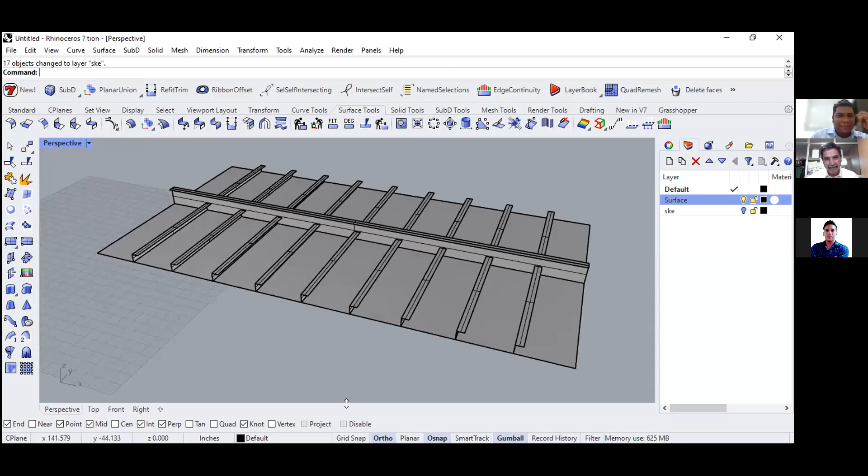I didn't. So right. Wow. You completed all. Did you copy from somebody? No. It's easy. Okay. That's nice. Good. Nice. I like it. So you're a good instructor, Isaac. You can take my place now. Okay, we are going to continue now. Exactly.

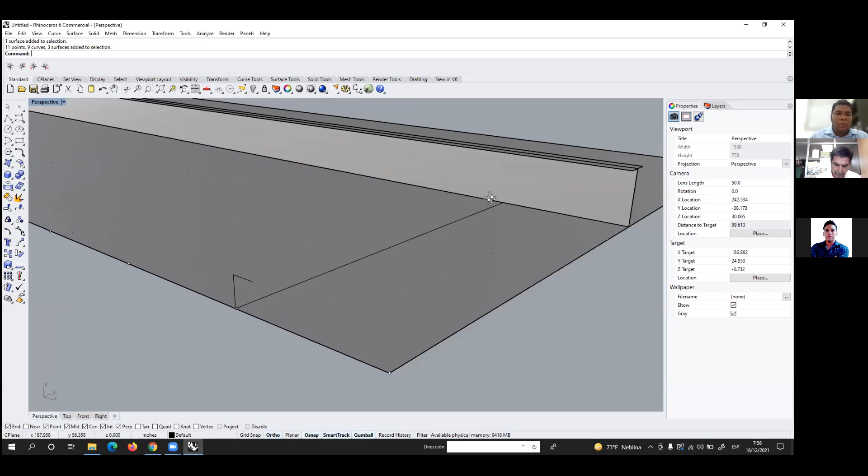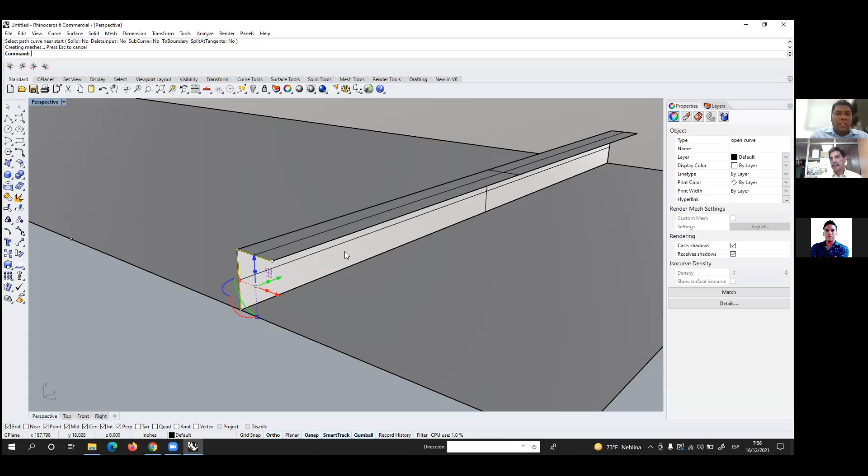So the next step is the same. You have to extrude this profile along this line, right? So click on this profile of the thickness, then go to Surface, select Extrude Curve, and then Along Curve. Then you have to select a path. So this is the extrusion of the profile. Okay. So the next step is to copy this profile, this surface, to every point.

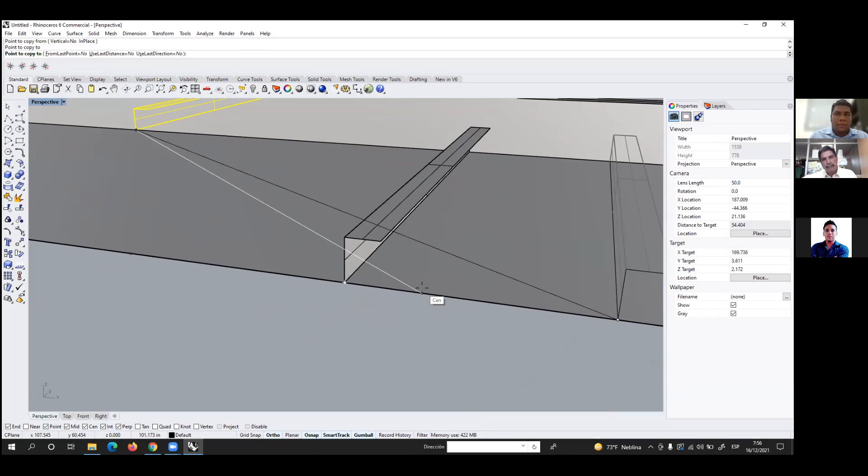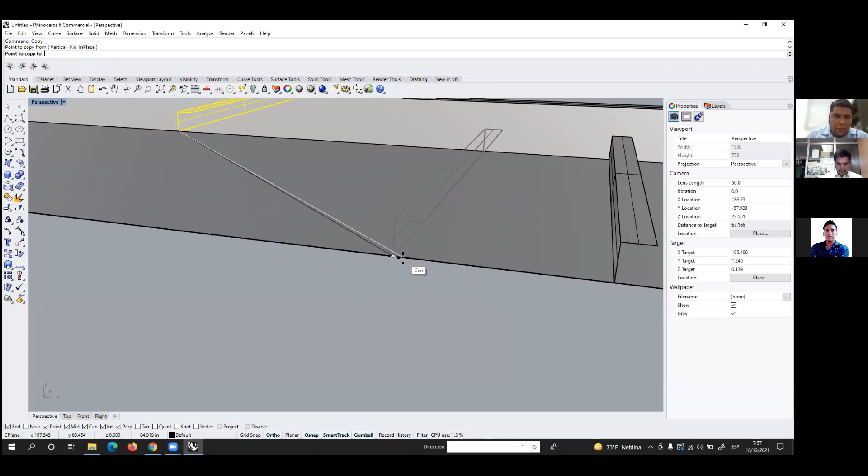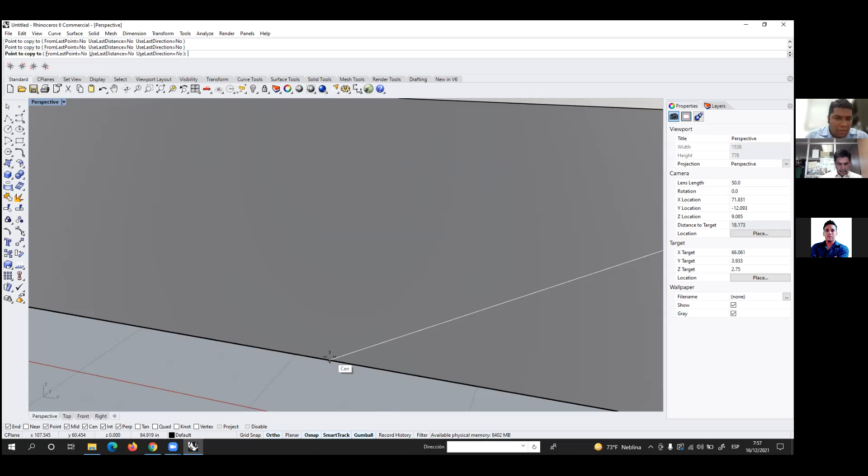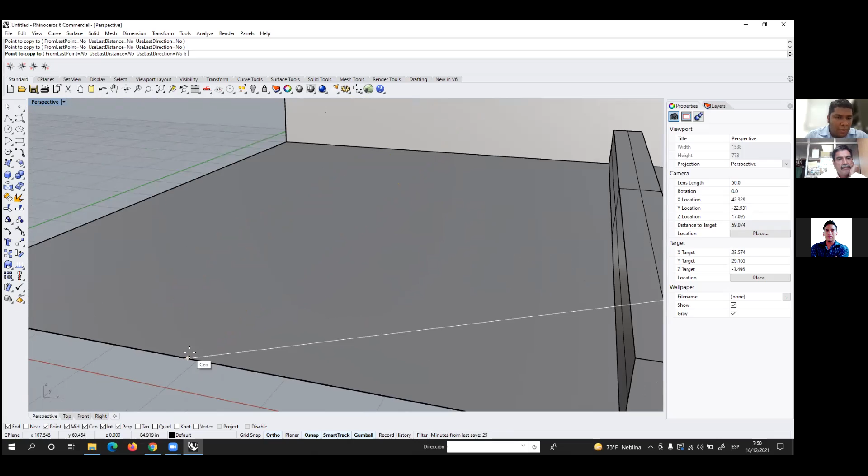One moment. One moment. Okay, so copy this for each point. At each point, copy for each point. Each point. The last one. Yeah. So there are 2, 3, 4, 5, 6, 7, 8, 9 thicknesses.

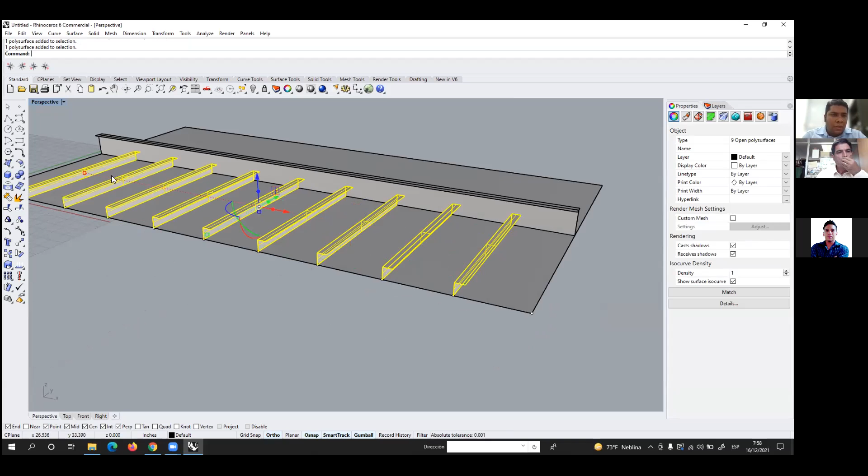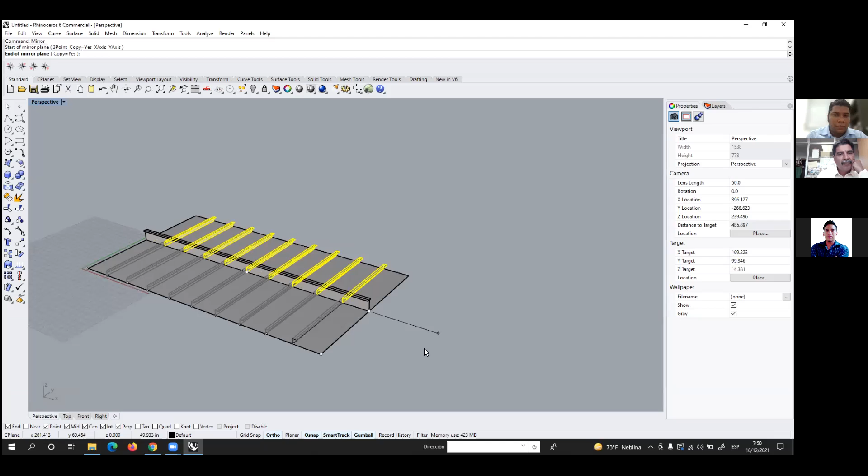Okay, so then you have to select those stiffeners and use the Mirror tool. So type mirror and then enter, and select this point in the middle of the plate, and you see that the other part is drawn by symmetry. Okay, so next you can hide the isocurves, remove these points, and the final step, you have to delete every line that you drew, because you have to import only surfaces.

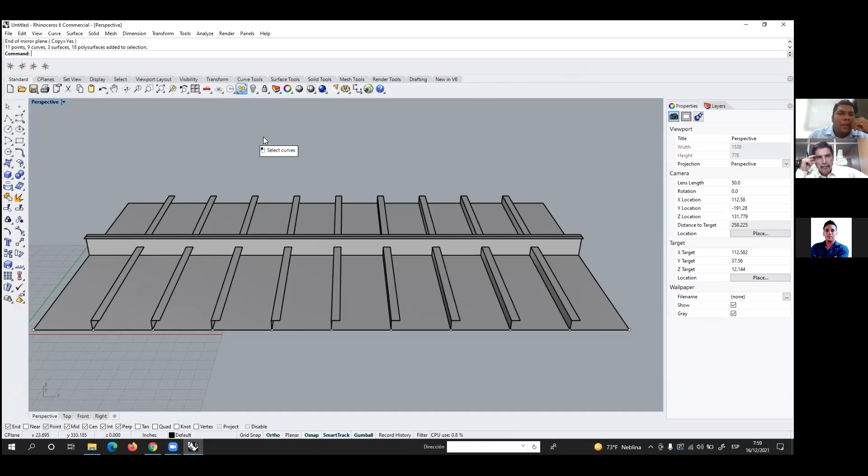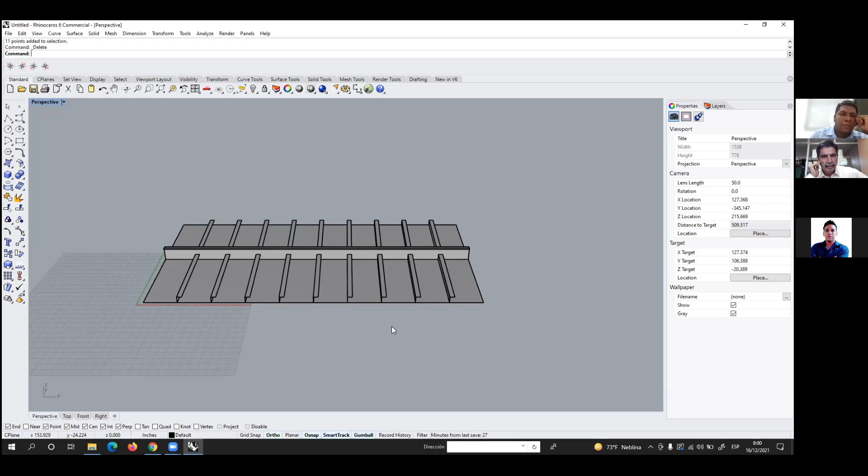So for this part, go to these options. Select all lines, all curves, and click delete on the computer, similarly for the points, because there are points in this part. So you have to go to this icon and select points. You see that the points are selected, and then click delete on your computer. So this is only surfaces.

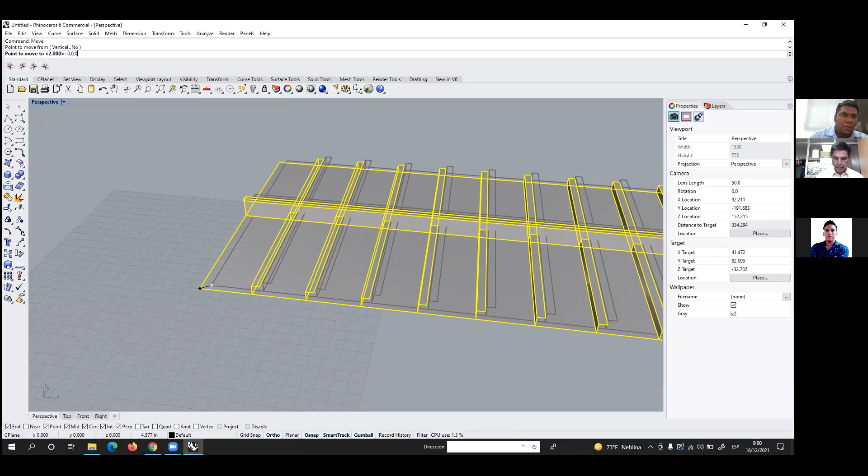So the final step is to select every surface and move it to the 0 point. So click on Move, select the point that you want to move, and then click the point 0,0,0, and then enter. So you see that the geometry is located at the 0 point, the origin. Okay, so that's all of the geometry. Okay, questions, students, questions so far? Can you do it? Is it easy, difficult?

Excuse me, can you repeat deleting lines and points? Okay, go to these options. And you see that in this icon, on the right part, there is an arrow. So click this arrow, and you see every option that you can select. You can select by layer, by faces, by lines, by points, by solids. So in this case, you can select curves, and you see on your screen that the curves are selected. The same for the joints. The same for the points. Okay, thank you.

So you see now, okay, then the next step is to open, I think, Practice 1. This is the file that we did in the previous class, right? Practice 1. Engineer, I have a question. I'm sorry. When I save in IGES format, there is a notification asking how I can save it in IGES units. The program asked me right now. I have to save in inches too? Yeah, okay, in inches. Okay.

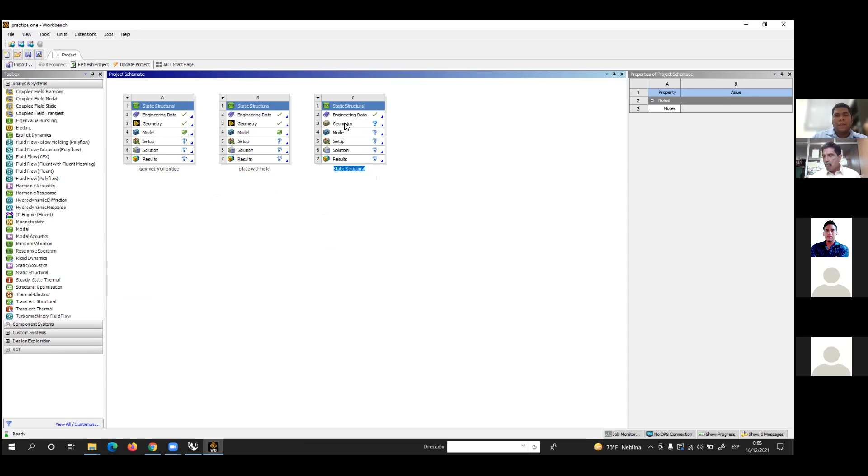So remember the two exercises that we did in the previous class. Similarly, drag a Static Structural to the workspace, and remember that Engineering Data is to put the mechanical properties of the material, okay, and the geometry. Right click on Geometry, and then enter the New DesignModeler.

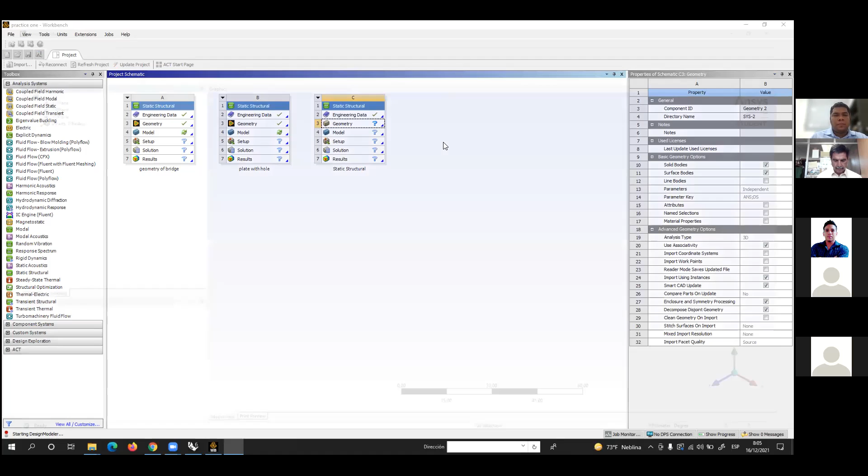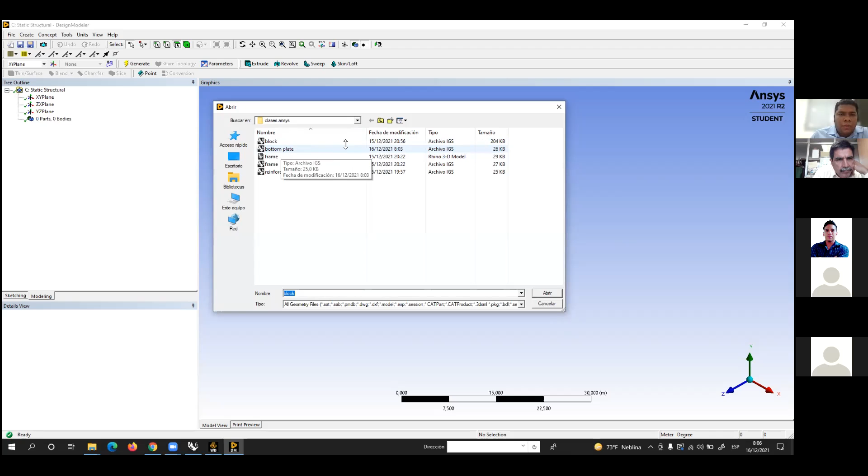Okay, so go to File, and then you have to use this part, Import External Geometry File. So select Import External Geometry File, and you see that this is bottom plate in this format. So select bottom plate, and then this is the import. Then you have to click on Generate. You see the geometry.

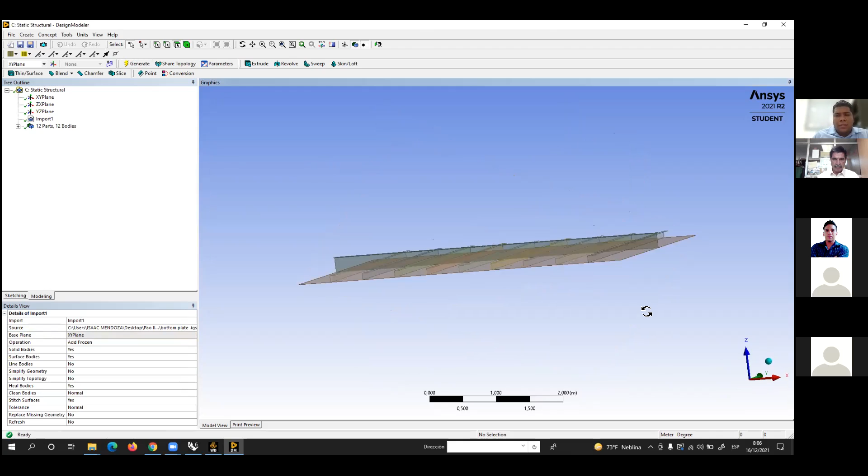Okay, so remember that the geometry unit is in inches. So you have to change the unit to inches right now. Okay, so the final step is to assign the thickness for each element, right? So you see in this part there are 12 surfaces. You see, for example, the shell, the other shell that you see in the yellow part. So you see the thing, right? So the other stiffeners. This is, you see, the flange of the longitudinal girder.

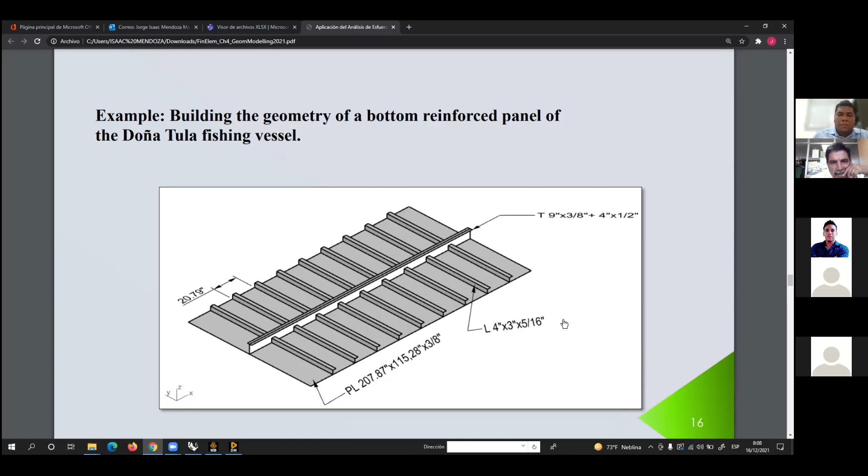The other option is the web, and the other is you can enter the thickness. For example, the thickness of each stiffener is 3/8. No, it's 5/16. So in inches, 5/16 is... the thickness of the stiffener is 0.3125. So this is the value that you have to input.

So you can select, for example, if you want to assign the thickness for all the thickness, you have to click on the first stiffener and then select shift, and then go to the last stiffener and select this part. So all the thickness are selected now.

So you can input the thickness now. In the thickness mode, change to user defined and then the value of the thickness is 0.3125. So right now you see in the upper part and the lower part the thickness for each stiffener.

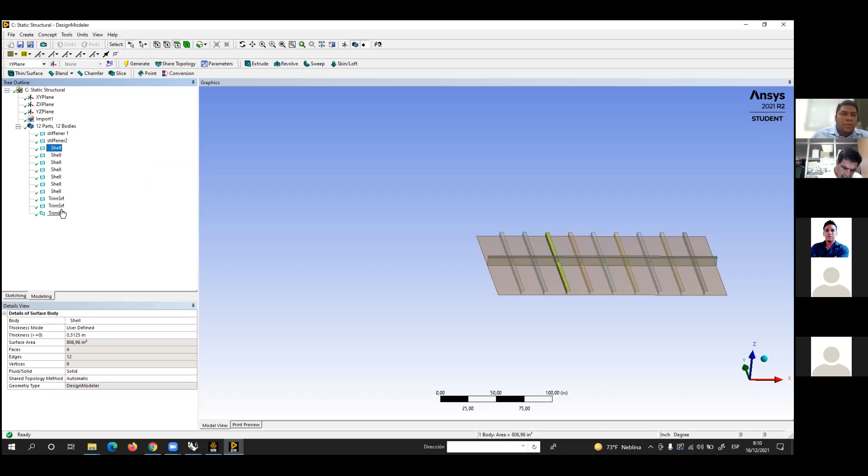So the same for the flange and web. You can rename and put, for example, flange. Then rename and put the name web, and the other surface rename and put bottom plate.

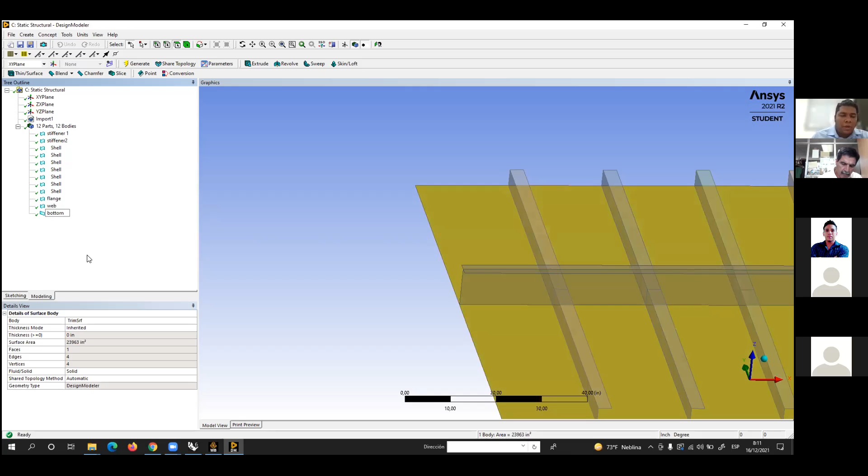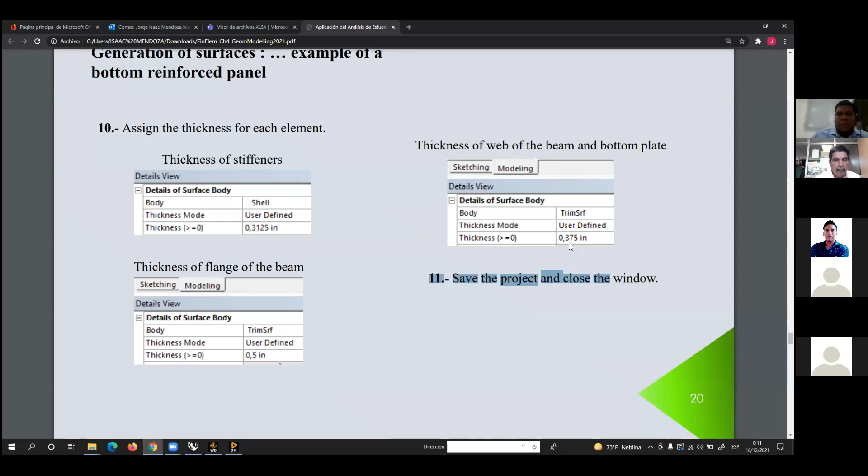So the thickness of the flange is 0.5, and the web is 0.375. Flange is, you have to change to the user defined and then input the thickness.

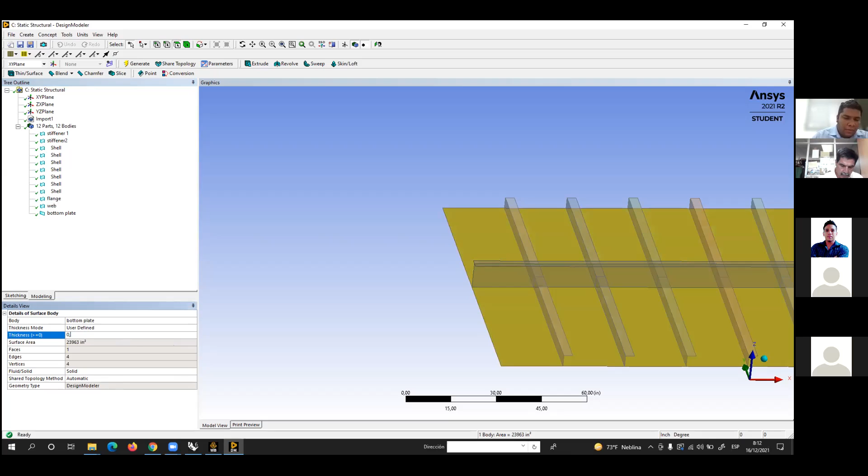0.5. Web, so the same, and this is 0.375, the same for the bottom plate: 0.375, that is comma 375. Okay, so that's all.

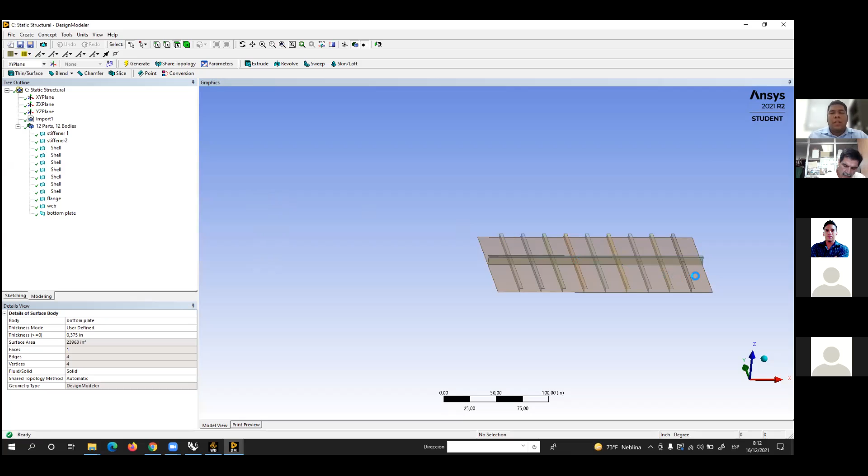So this is the geometry with the thickness of the structure. Remember, always save the project, always, and then you can close the window.

So now the exercise is finished. Questions so far? Any student can... let me stop the screen. Any student, can you do this exercise? Can you import the geometry to Rhino, from Rhino to ANSYS? Any student?

Yes, engineer. Can you show me? Can you show us? Yes. Yes, okay.

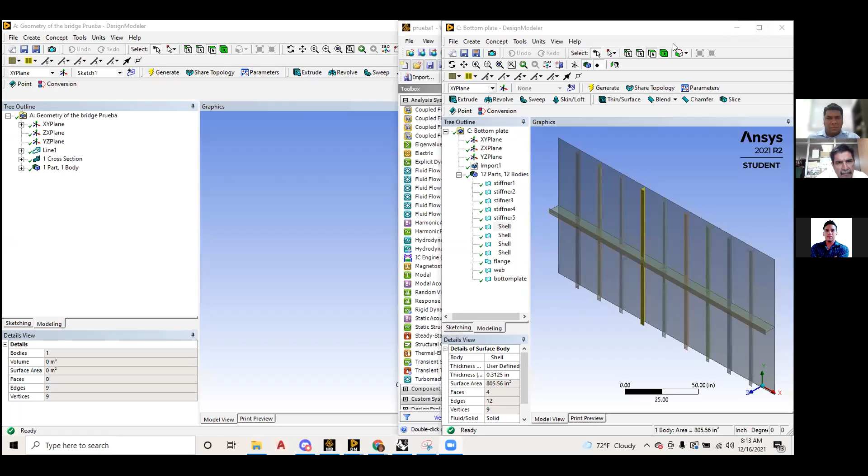Did you assign the thicknesses for every part of the structure, Ms. Vera? Ms. Vera, did you assign the thicknesses for each part of the structure? Ms. Vera, can you hear me? Right.

Okay, it was nice because she changed the names of the elements, so she can easily identify each one of the elements in the structure. That's a good practice, that's a good practice.

Okay, let's move on, Isaac, to the next exercise. Okay. Let me...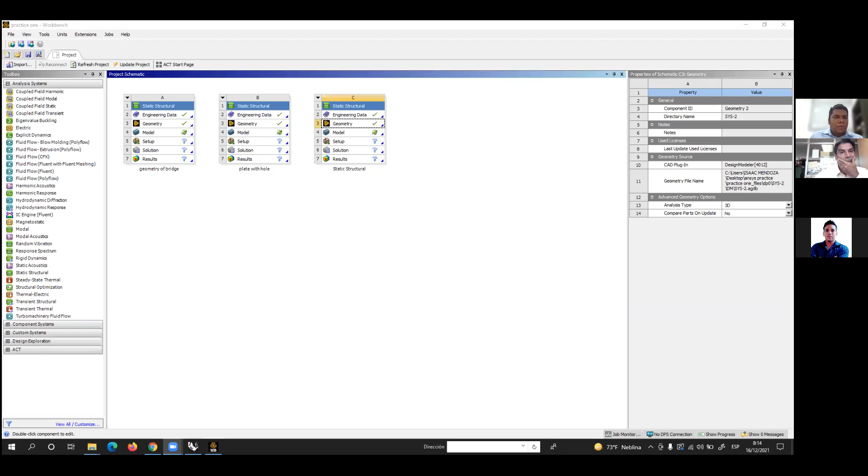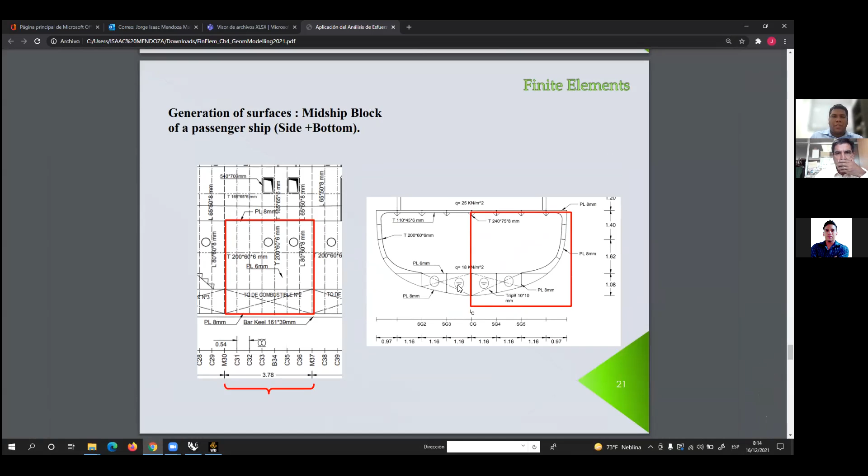So the next exercise is to create a midship block of a passenger ship. So you have to draw the side plus bottom. This is a part of a ship, but the ship is a passenger ship. So you can see the frame in this part.

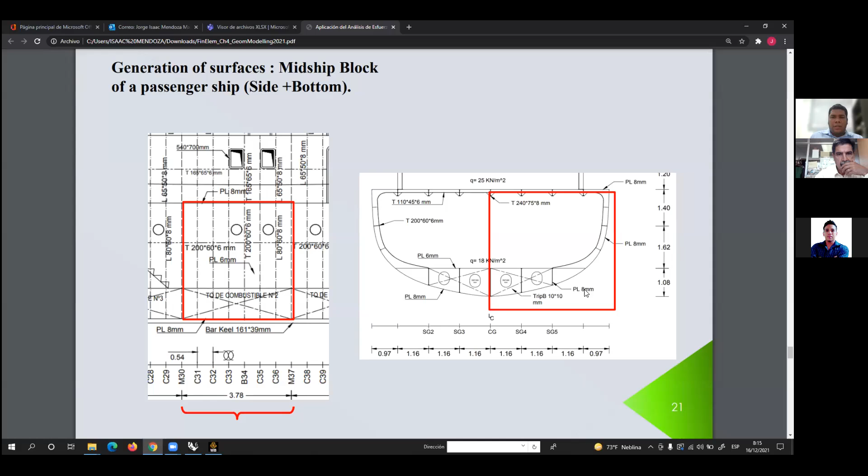For example, you see the thickness of the plate, this is 8 millimeters. This is the longitudinal girders, which is also plate, and the thickness is the same. So the bottom, the inner bottom, is 6 millimeters.

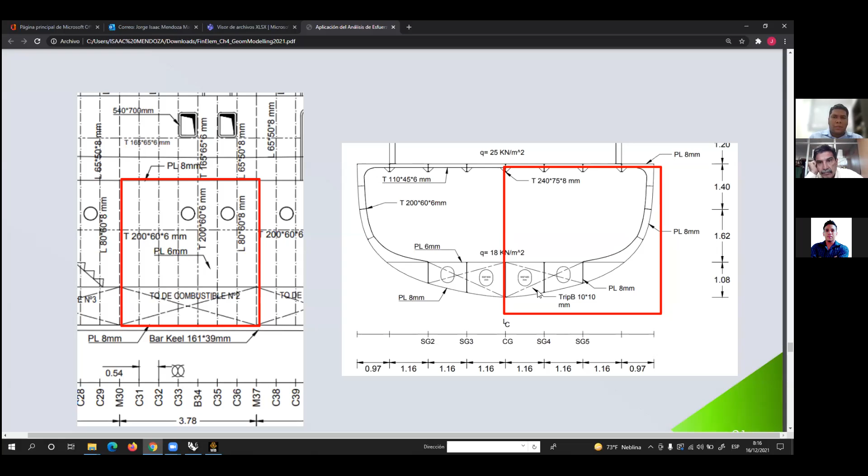In the side, you see a frame. So the frames, you can see in this part of the frames the profile of T. This frame is 80 millimeters per 60 millimeters, and the thickness is 8 millimeters. So you see that in this part you see the web frame, which is a big frame. This is more higher in this part.

What else? So this block is between bulkhead, from bulkhead 30 to bulkhead 37. So this length is 3.78 meters.

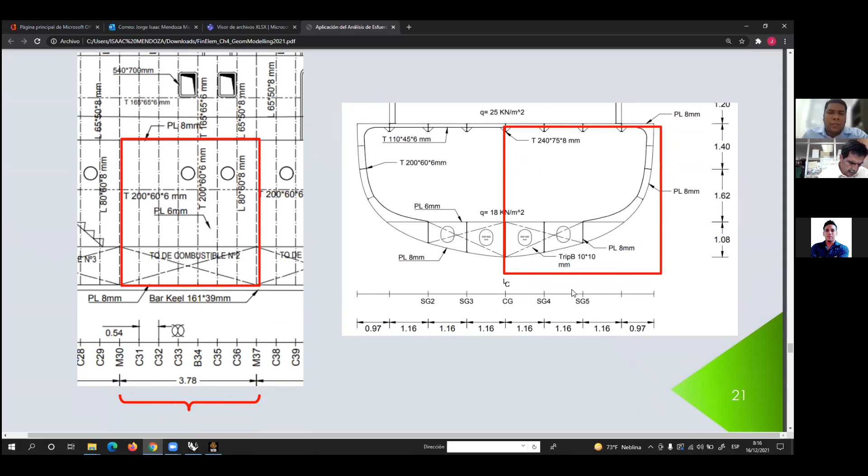That's all. So in this part we're going to do the modeling in Rhinoceros. So we start with these stations, with this frame, with the stringer and the double bottom and the side girder, and then you have to extrude this line in the x-axis, the extrusion dimension is around 3 meters.

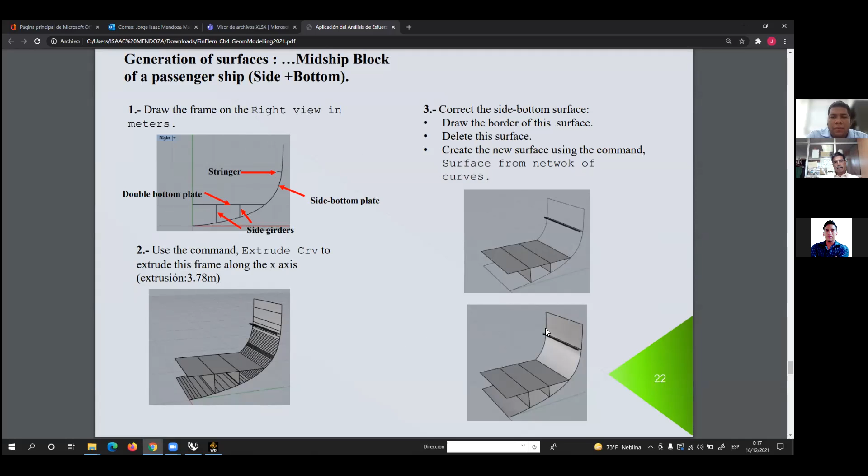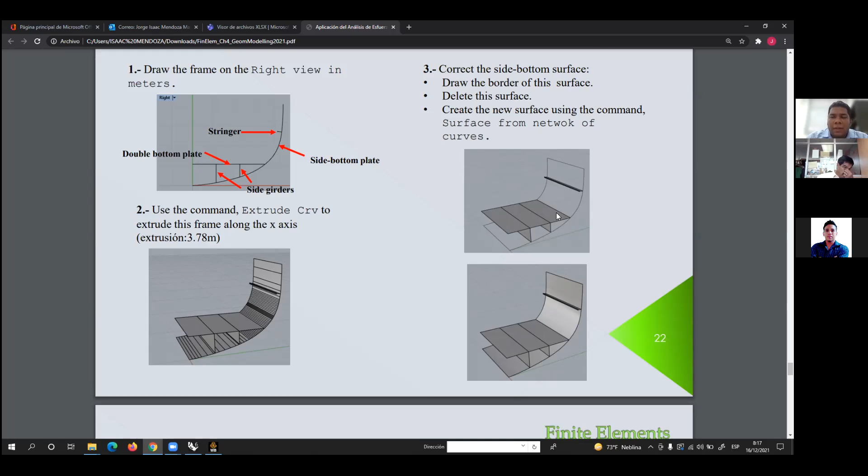And then in the next step, you have to correct, or improve the surface in the side bottom. So you see when I explain in Rhinoceros, right view. So next you have to use the tool contours in order to...

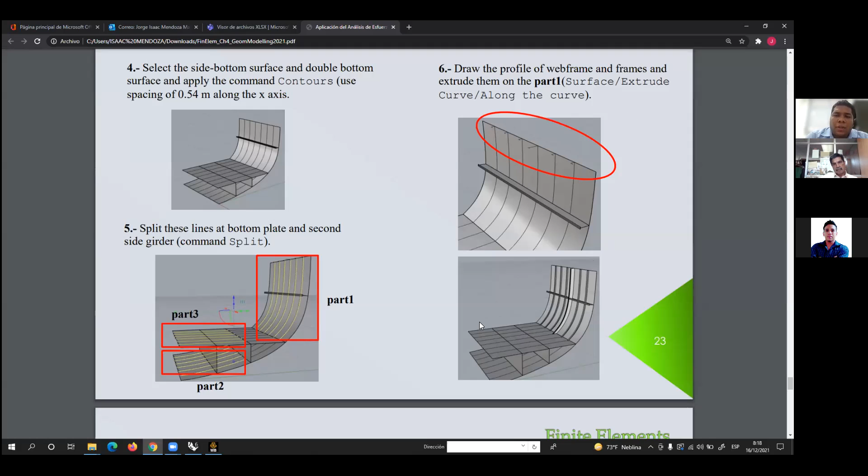So it's easy to follow this step. The same for part 2 and part 3. You see the other elements. Finally, you have to create a solid floor and then the bracket floor.

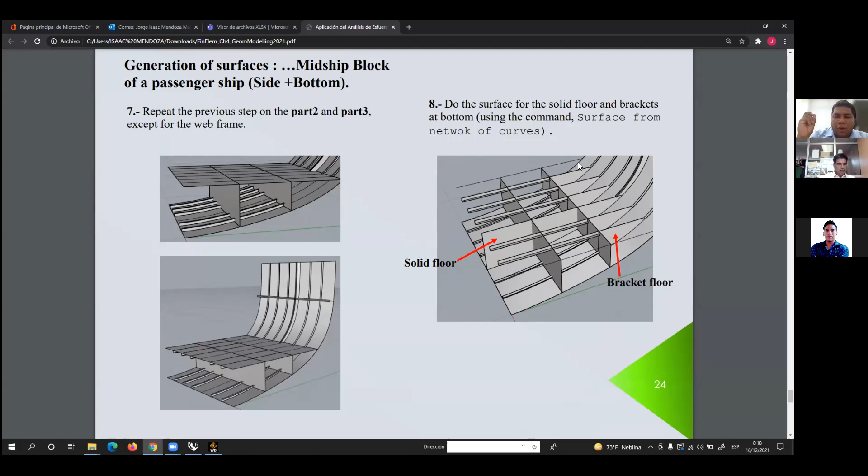So always remember that when you create a surface, you have to use 'surface from network of curves'. Remember this tool, right? So that's all. You have to delete every line and point, and then you have to input the geometry and assign the thickness in the ANSYS program. So now we're going to do this in the ANSYS program.

So maybe, Doctor, this is a good point for a second break, right? Yeah, this is a good point to make a break. People, all of these instructions were handed to you, so you can take a quick look at them, because when we return, Isaac is going to lead you in the development of this exercise. It's basically very similar to the other, but there are a couple of extra commands that you have to employ. Please take a quick look at the information Isaac sent you, so you can follow the instructions easier.